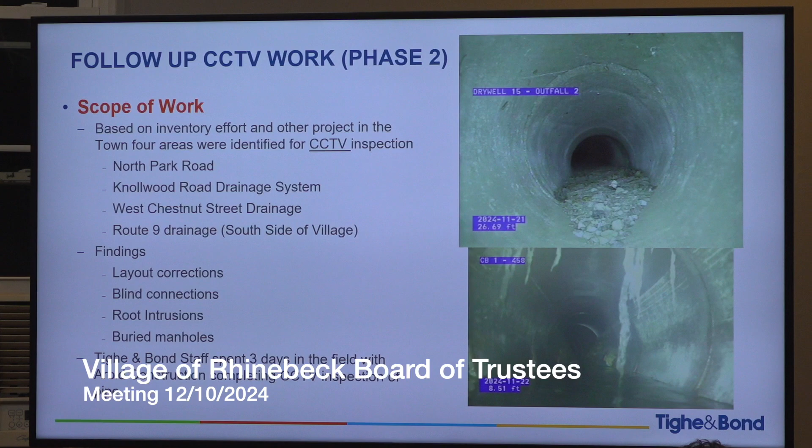After that process was over, we came back to the village and had identified a few areas of concern that we couldn't really inventory. Our inventory was from the surface, so we can't look down in pipes. One issue we were having with the village was that there are a lot of blind connections within the community.

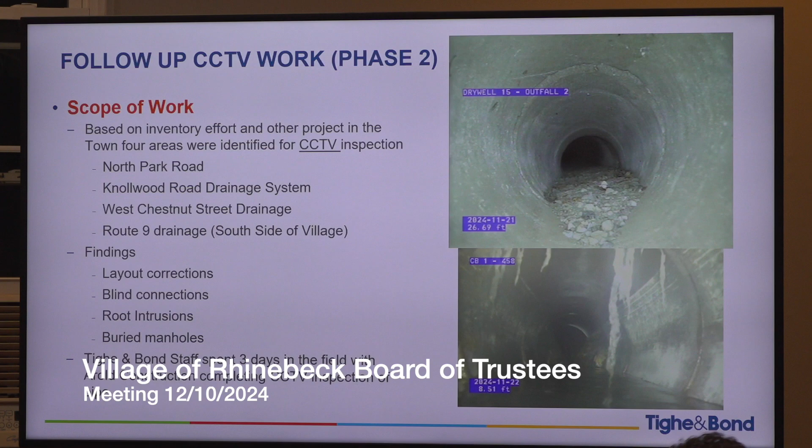By a blind connection, I mean it doesn't go to a structure where we could open, say, a manhole, look down, and say okay, the pipe goes there. It would be like 2 pipes just teeing together with no way to see how they connect. That led to some questions about how drainage systems were laid out.

We had identified 4 areas that we asked the village whether they'd like to CCTV to get a little more information, and they allowed us to get a CCTV contractor in to video the pipes.

CCTV is basically closed circuit television. They put a little robot down in the pipe and walk it along, making observations about condition - whether it's half full of sediment, whether there's root intrusion - or they can look up if they come into a structure and figure out where that structure is located. These videos are kind of boring to watch, but they document everything along the way and are really helpful for us.

The 4 areas we identified for the village to video were North Park Road, over by the park; Knollwood Road drainage system, which had some confusing connections we wanted to clarify; West Chestnut Street drainage, which had a flooding condition and unknown layout; and Route 9 drainage - and I'll make a correction here - the south side of the village, because there are 2 portions of Route 9 we'll talk about that have some curiosities. So we originally asked to look at Route 9 drainage on the south side of the village.

The findings we found using CCTV show there's a number of blind connections in the community where pipes just tee together. The reason a blind connection is a problem, or could present a problem, for a community is that it makes it really hard to maintain pipes.

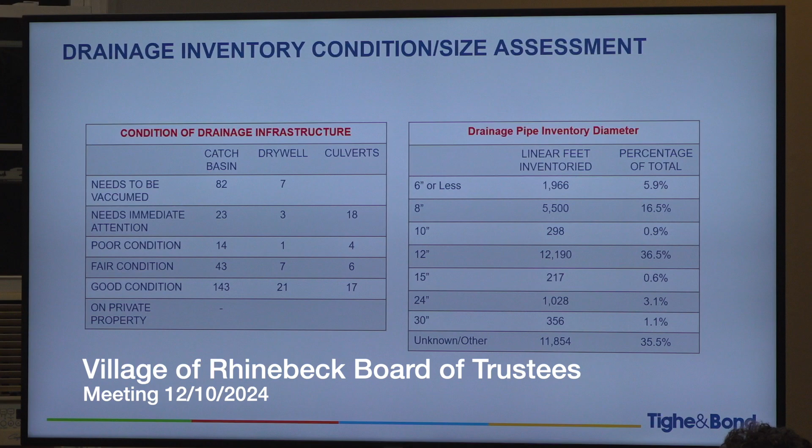Condition of infrastructure. It's not as bad as you would think. So the number of catch basins that need to be vacuumed are 82, and dry wells 7. Needs immediate attention: 23 catch basins and 3 dry wells. I'd like to say we were overly conservative in this assessment.

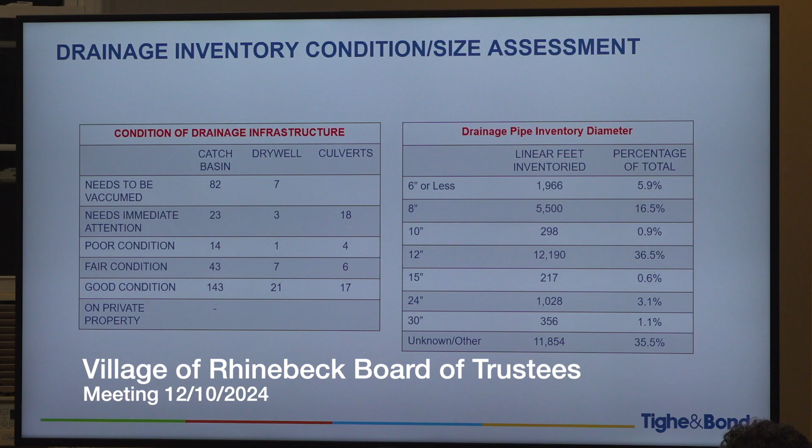So what we wanted to do is identify the things that we wanted Kyle and the DPW to put their eyes on. So when we say needs immediate attention, it could be something super simple, like a structure we couldn't open with our 5-pound hammer. It may just take Kyle's crew with a sledgehammer and a little bit more time to open a structure. But you want to be able to open them so that you can properly maintain them over the years, and you don't want to have to do that in an emergency situation. You want to have them do it when the DPW has time to do those activities.

I would say that a third of your catch basins needing to be vacuumed is not uncommon for communities, particularly with communities that have as many street trees as you have, because that debris is going to flow along the roadway.

It's going to fill into the catch basins and start filling them up. Part of what drives catch basins to fill up with debris is the sizing of pipes. Your DPW or highway standard for pipe size would be a minimum of 12-inch. As you can see on the right-hand side, there are a number of pipes under 12-inch. So you have a small 6-inch pipe with a bunch of leaves coming down into it during a large storm event in the fall, and it's easy for those pipes to clog up.

So one of the things you may want to identify as a community moving forward is, if you're going to repave roads, look at this map and ask do we have any undersized pipe in the area, what is the condition of our structures, do we want to repair some drainage infrastructure the year prior to repaving a road. This map allows you to make that assessment at a whim rather than having to send people out to check the road.

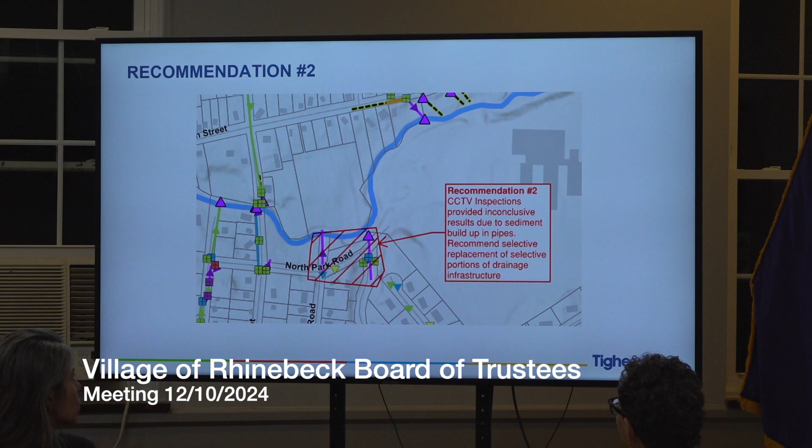That data gets automatically uploaded into the ArcGIS system with the identifying structure. It's hard to see right now, but each one of these squares represents a catch basin. That catch basin's color tells you what condition it's in, and there's a legend associated with it.

If you click on that square, a sidebar pops up. That sidebar includes an image and the pavement condition around the catch basin, the size of the rim, so if there's a discussion of whether that rim is too small, the structure's depth, what type of invert sizes are leaving and coming into that structure, the width of the concrete structure itself, and the material of the structure, whether brick or concrete.

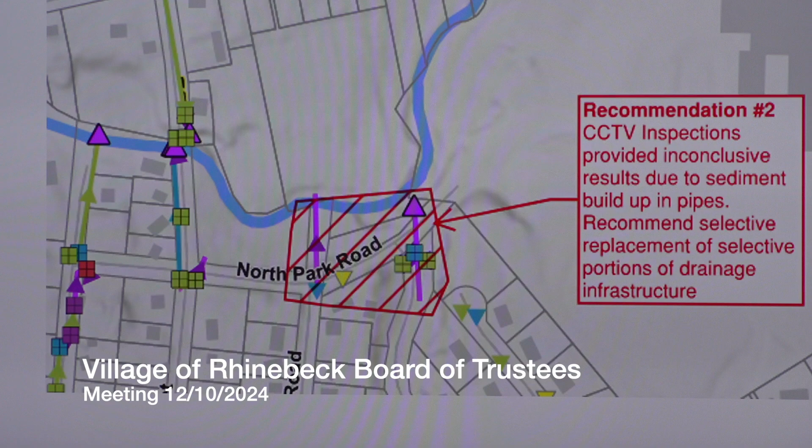Trying to think of what else - our assessment of condition and any notes associated with that assessment. That's all time-stamped, with date and who took it.

In the future, as the village starts making their own assessments, as things change or they change things out, it will say, for example, Kyle or Amy on January 20th, 2025 assessed this catch basin and took this photo, with notes. It's all associated with the particular user, and we'll update as we go along.

For drainage lines, you see there's three or four different drainage pipes with different colors here. The colors associate with what we determined to be the condition. Pipe condition was a little trickier, and I don't know if I talked about that already.

Because we didn't CCTV all of the community, we only CCTV'd select areas. Pipe condition is really hard to tell from the small image of the invert you can see from inside a catch basin. So if we could make an assessment on pipe condition, we did, based on what we could see from the invert, or if it was clear from the CCTV there was something wrong with the pipe. Otherwise they're general assessments of condition based on material - HDPE is typically a newer pipe material, so if we saw HDPE pipe, we assume that to be good condition pipe.

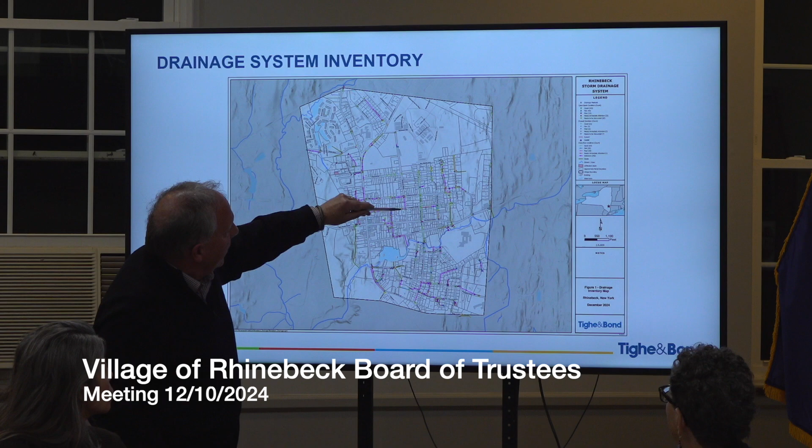Can you go back a slide, I have one more question. An area that's always concerned me is Mulberry Street - the connections on Mulberry that come down, then down Livingston Street, cross over Center Street, come all the way down and feed into Landsman Kill. The sizes of the pipes, as this is continuously collecting more and more water - is that something you considered, or is that not part of this analysis? Because that's a long path.

We did not consider the hydraulic patterns and whether a pipe needed to be upsized. For the particular area, we may have previously done a hydraulic analysis of at least the Center Street area, but I don't think we did north of Center Street. So if it's something we needed to extend, based on the measurements we took and LiDAR data, we could take a quick look at areas north of that, and determine if we needed to do survey work to get better data for a more in-depth hydraulic analysis.

Any other questions? We would know if that was a problem because we'd be seeing backup further up the system, right? You would, typically, if you have a pipe sizing condition - not in your short rainfall events, but in more deluge rain events - you'll find catch basins starting to back up, with water bubbling back out of catch basins rather than going in them. So they're kind of self-policing in a way - the community will usually come to you pretty quick if you've got water coming out of catch basin grates.

And so they're pretty identifiable when you have those restrictions. Now, that being said, we don't typically design for more than a 10-year storm at minimum, and we don't get a full 24-hour 10-year storm all that often. So there could be issues within the community as we start to get more intense rainstorms, you may find along the way.

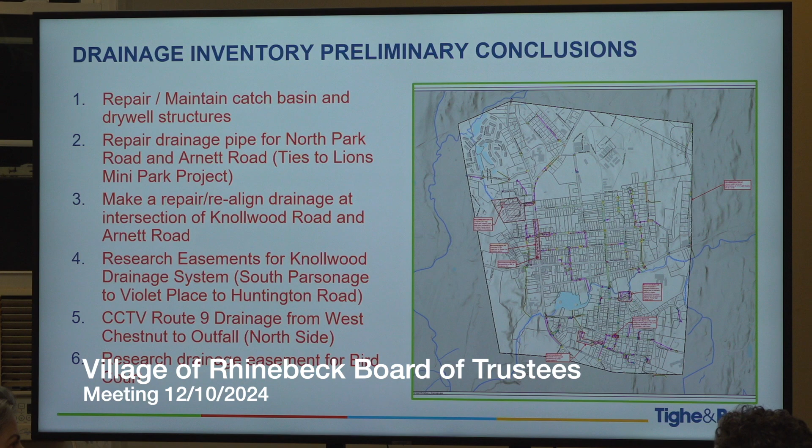It's pretty standard for about 30% of catch basins within a community to need some type of maintenance. Some communities I've worked with use that as their metric for catch basin vacuuming - they try to vacuum 33% a year, so they're vacuuming each catch basin once every 3 years. They set their catch basins up on a schedule. That's just the way I've seen some communities do it.

The second conclusion we came to was that there needs to be some type of repair for the drainage pipe on North Park Road at the intersection of North Park and Arnett Road. This ties with the Lions Mini project. That pipe is clearly clogged and not functioning appropriately - we still can't find an outfall, and we've dumped hundreds of gallons of water down it. That may be contributing to the soft condition we're getting at the park.

So some type of expansion of the Lions Mini Park project should be considered to include catching that water from the intersection of Arnett and North Park Road. I'm going to zoom in on these areas, so if you're not familiar with them, give me a second to get through the bullets and we'll look at each one.

The third conclusion is that the village should probably consider making a repair or realigning drainage at the intersection of Knollwood Road and Arnett. This was an area we had to CCTV to understand what was happening. There are a lot of repairs and blind connections in that area that will make it really hard to maintain that system in the future.

And there's a lot of drainage area coming to that. If it was only a couple of catch basins, we'd probably say just leave it. But because of how much upstream drainage comes down to that area, I think it's probably best that you make some repairs and realignment to the drainage infrastructure there.

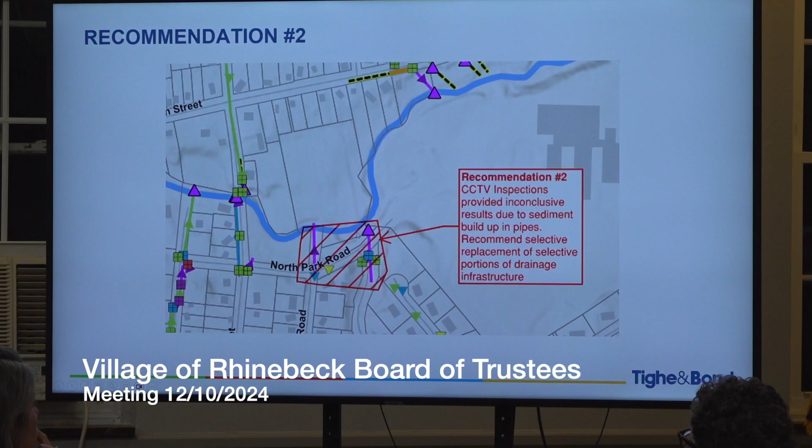Just for those of you that may not know the areas, here's North Park Road. We had previously identified this area as needing CCTV because there's a number of blind connections that come to this outfall at the Landsman Kill. Up here there's a pipe that leaves this catch basin—actually it's a dry well, my apologies. They leave this dry well and head north towards the Landsman Kill, but we could never find where the outfall was.

We dumped dye down it. We dumped a lot of water down it. That was the pipe you saw on CCTV that was half full of sediment, but it gets to a point where it's about three-quarters full of sediment. There's a number of joints within that pipe that are not well connected. It's a concrete pipe, so I think we're losing a lot of water through those joints.

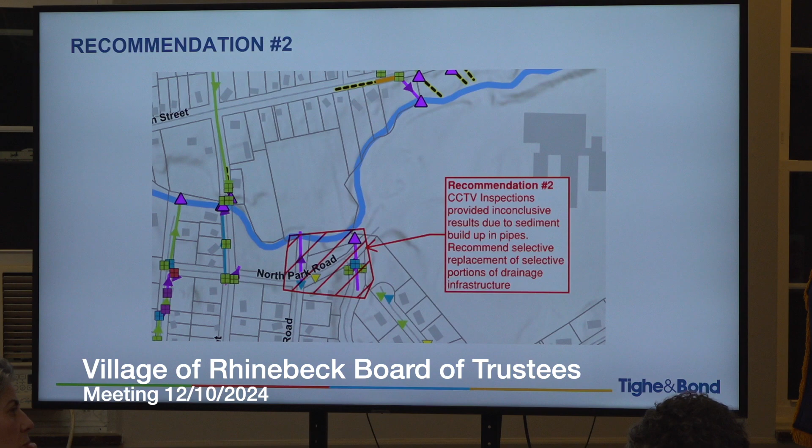And I think that there's a home there that has flooding in the front yard. Well, the intersection, the swale down at the bottom of Huntington floods on us all the time. Yeah, they pump their basement into the street, which doesn't work because it just flows right back into the river. I will tell you that the culvert on Huntington Road was one of the ones identified as needing immediate attention, but the inlet and outlet for that one are totally buried. I felt it via a stick, but I can't see the pipe at all. So that's one of the ones the village should probably look at for maintenance.

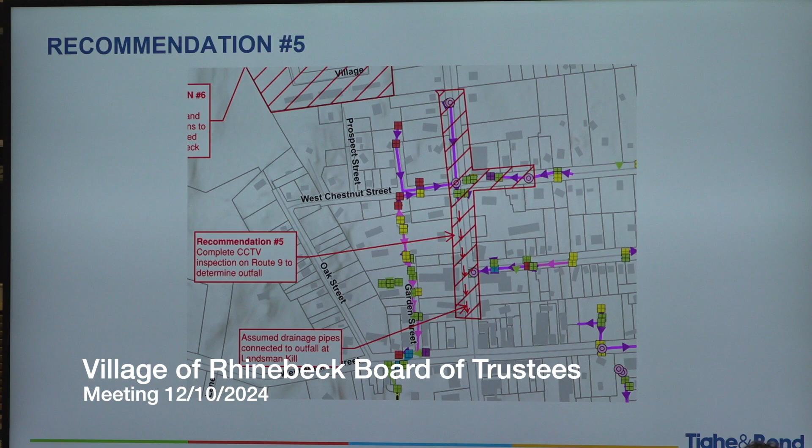Out of curiosity, how does that work with the state road? The state has informed us that all the infrastructure within the village is the village's responsibility. The road itself has been the state's.

Will this take us 5 years to get a permit in order to fix it? Hopefully not, we can go in and fix it ourselves since we own it. Do we have to tell them? Yeah, because if there are any road transportation issues. So it's not a total disaster then.

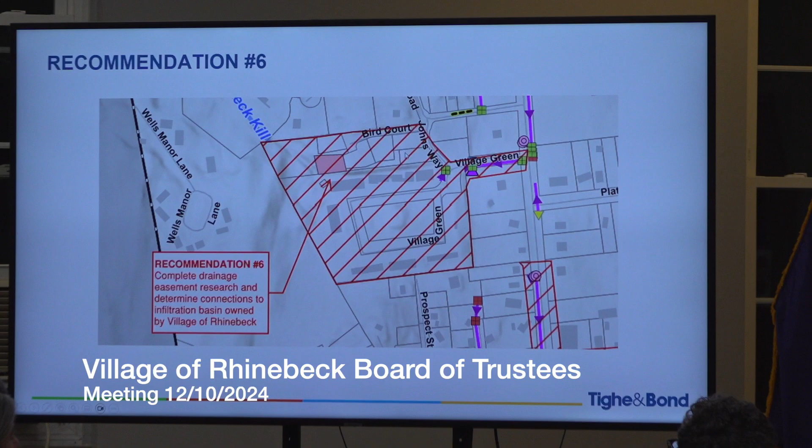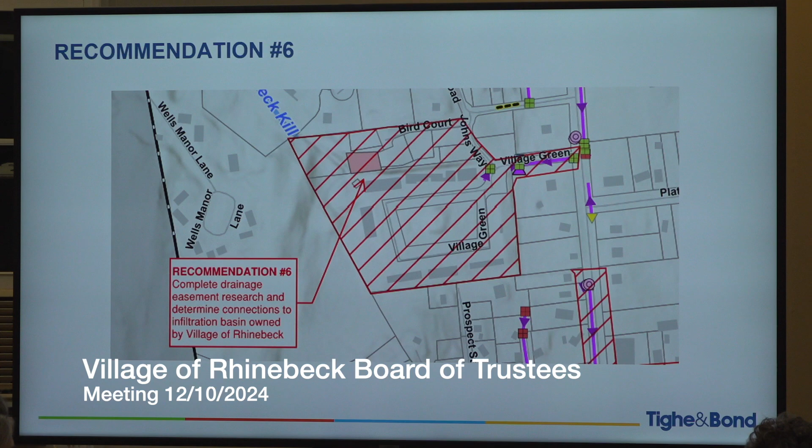Okay, this is the area on Bird Court. We had kind of stopped inventorying because we recognized these streets were private. But back here is this red area, which is an infiltration basin, and that property is under village ownership. So we came back to this one thinking we may want to reconsider what's happening with drainage infrastructure in this area and whether there needs to be additional inventorying and assessment of needs there.

So that part of Village Green, is that the village's responsibility, or is it not? This area right here is all private.

What we have responsibility for is Bird Court and John's Way. Oh, you do have that, okay. Yes, we do, Bird Court and John's Way are our roads. But anything going into Village Green and around Village Green is owned by them. But the exit there is not, they also own the exit, they do own it, because that's where it was. It's owned by them. And so right now the village is maintaining asphalt, stormwater infrastructure and everything on Bird Court and John's Way.

Well, it's only a few years old, but we haven't done anything to it. I looked at the DOT's plowed local road list and it didn't come up there, but maybe I was looking at one too old to show it. Yeah, Bird Court and John's Way have been turned over to the village. That's helpful, okay. We will then, as part of this, just take a ride out there, and if there's additional infrastructure we missed on those two roads, we'll add it to this.

Next steps for us are turning this information over, as we talked about. There was one other point I wanted to make. One of the things that I think will be most helpful to the community, specifically as we just talked about here, is making sure we start documenting easements on this map, because it's one of the things we struggle with the most.